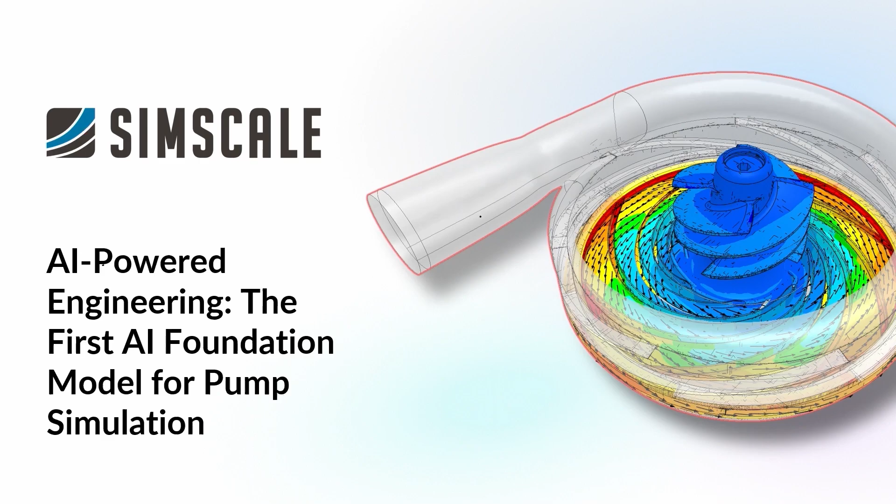We're very excited to show you what we've been doing recently with AI, and we think we're going to show you a sort of a world's first here, a foundation model specifically for pump simulation, and the first widely available one. You can go and try and use it, and we'll tell you about that at the end of the presentation if you'd like to go and try this.

I think we promised some audience participation, and we're going to be looking to you in a moment to see whether you feel ready for this kind of wave of innovation that's coming our way. I think for some people it may feel like they're already surfing down the wave, some people are still paddling out to it, some people are maybe waiting for the next one to come along. And we'd like to know really what you're doing at the moment - how are you using AI to accelerate various different things that you might be working on.

So, as the first one, research. If we could have a quick show of hands just to see if you're already using AI tools, maybe LLMs, to do research at the moment. Two, a couple. Anyone else? Yeah, we won't tell you university, don't worry.

How about writing? For improving writing, drafting. Yeah, super useful, right? Yeah, it always surprises me with that, actually. I think I've written a really good email, and then I put it through ChatGPT to see if it can be improved, and then it's always better. Yeah, it's hard to say no.

And how about simulation workflows? You got one? 1.5? Yeah, cool, okay. It's good.

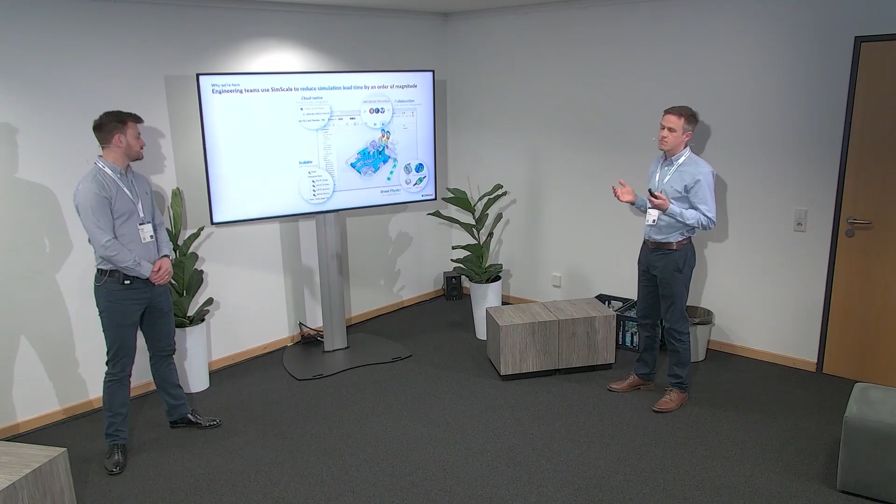So this is what the tool actually looks like, and I think one of the main impacts that it brings to our customers is that they're able to reduce their simulation lead time and turnaround time really by like an order of magnitude. And so you can see some of the key features here highlighted. As I've mentioned a few times already, cloud native - you can see also there's co-editing, similar to Office 365 or Google Docs or something like that. Collaboration, so very easy to share models. Has broad physics coverage, highly scalable, of course, being in the cloud. You're very much kind of removed from all of those typical logistical headaches that you might find with kind of desktop CAE tools.

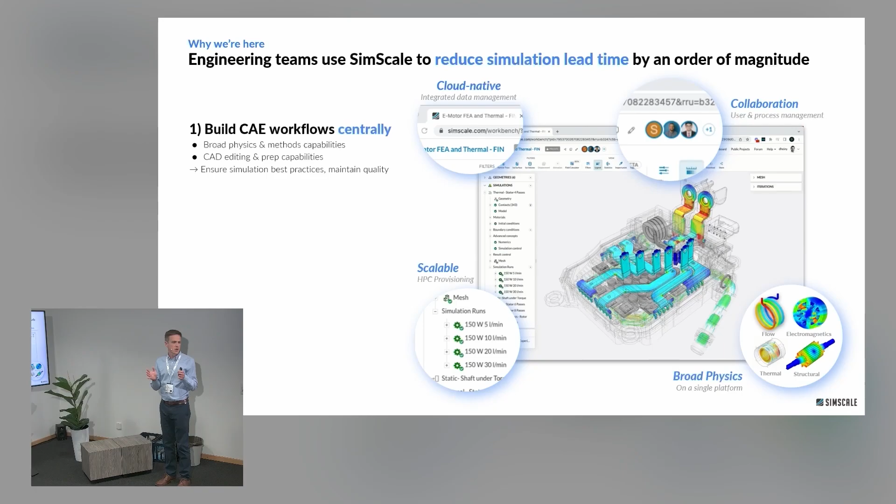So because it's cloud native, you're doing everything centrally - build all of your workflows centrally. All the physics is there, the methods, the full workflow from CAD, pre-processing, simulation, post-processing is all there in one place. This allows you to have very good control over your templatization and best practices, and you can deploy that broadly across your organization.

The collaboration aspect makes it easy to share projects between users. The whole thing is done through the web browser, so everyone gets exactly the same user experience, no matter who they are in your company. So the whole thing is very frictionless.

Crucially, for what we're here to talk about today, the AI infrastructure is also built into the same platform, right alongside the physics-based solvers. So you can easily take your simulation results, since the data is already there, train an AI surrogate, and get orders of magnitude speed up.

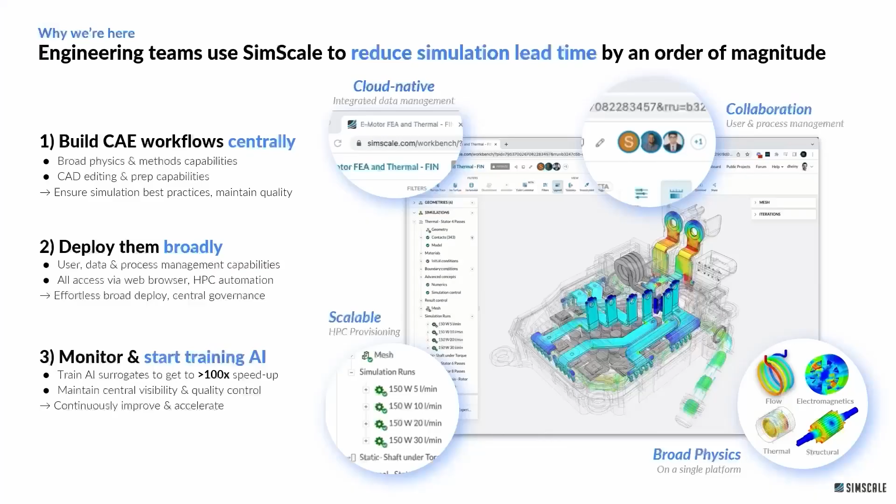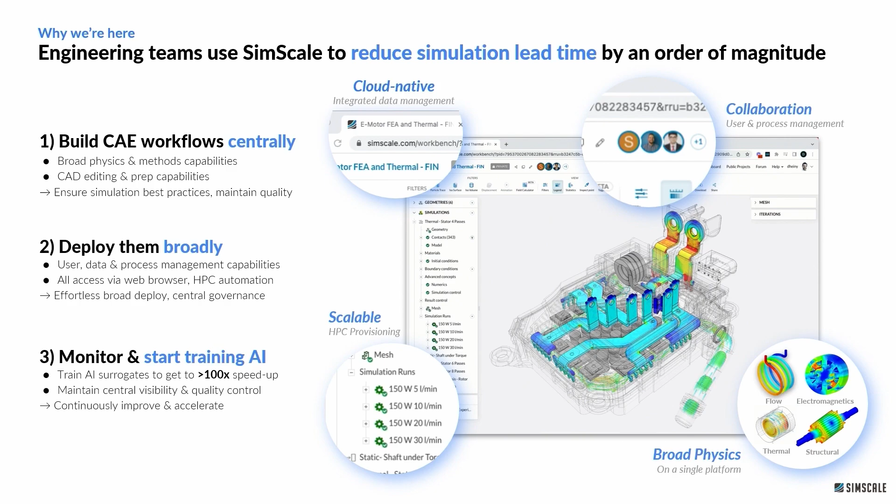That's one of the areas we're investing heavily in at the moment, to bring a really cutting-edge product to market that helps the designer with some agentic, not physics-based, but engineering-based AI to help with that setup. We'll see some examples of that later.

Back on this point of deploying broadly, that's where we're helping a lot of our larger customers at the moment. For example, big automotive suppliers are using SimScale to put a simulation tool in the hands of the designers—a high fidelity simulation tool that's easily templated and straightforward to use. In that respect, we're actually displacing a lot of incumbent simulation tools that are designed more for specialist simulation experts but aren't as easy for design teams to use. So they're pushing that simulation capability earlier in the process so they can iterate faster through designs and develop a better product at the end.

And that's following through into the AI capabilities as well. I'll say this because I'm a SimScale representative, but I think we have the best end-to-end solution right now for AI for simulation for designers, because it's all in one user interface and it's an end-to-end solution.

We can import any CAD file—we support all the major CAD formats—and you can do some editing as well. We have basic cleanup operations if you want to remove embossing marks, delete holes, or change dimensions. You can easily do that in the tool.

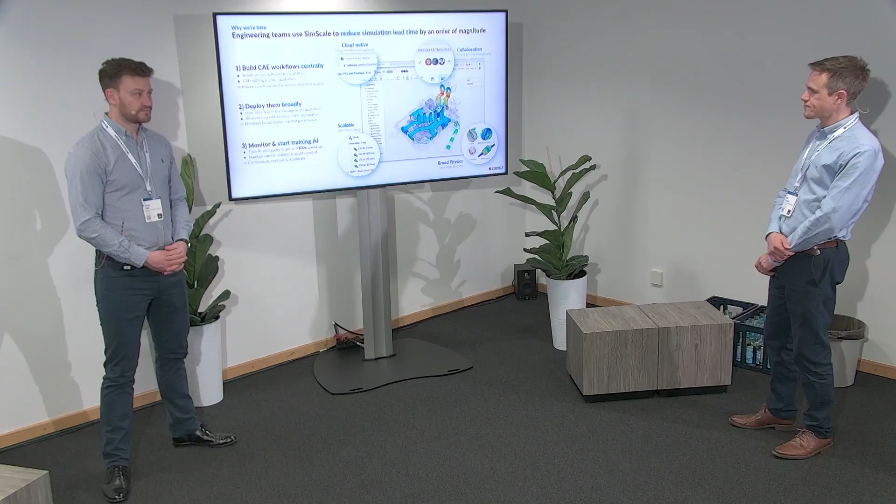Sorry, Alex. No, thanks for that.

How AI is really about to deliver some transformative acceleration to engineering workflows, to a point where maybe at some stage we'll be able to say, please design me a pump that meets such and such requirements—that's maybe ultimately where we're going. But first, let's ground things and think about how this relates to the AI tools lots of us are already using.

We can think about the things we use AI for today—we talked about copywriting, design, coding at the start. One thing to think about is why AI systems are so good at these things: they're trained on trillions of tokens, so there's a huge library of training data available on the public internet. This isn't really the case for engineering design—that kind of huge global data set simply doesn't exist.

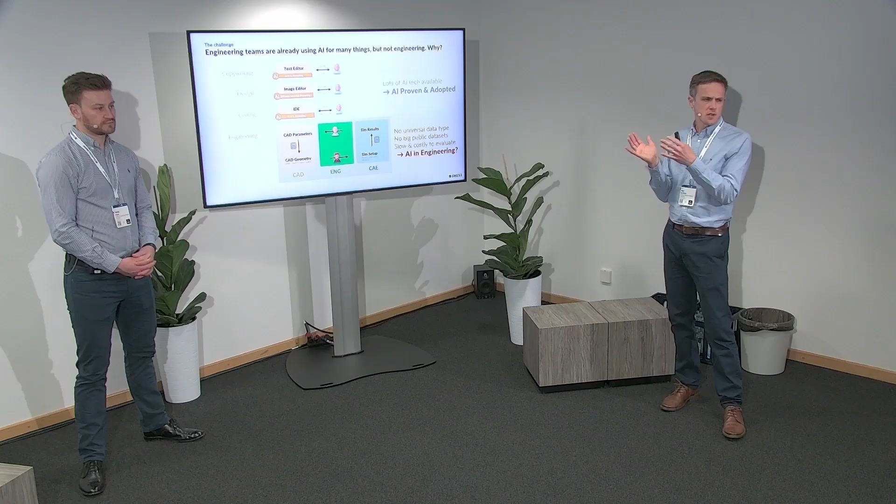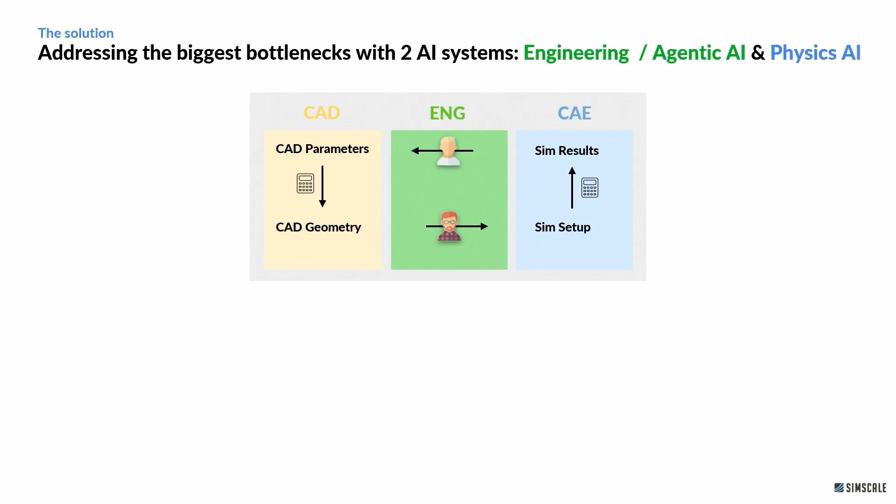I think we need something rather more methodical. And so the way that we see this looking is, if we go back to this view where we're thinking about those steps, the CAD, the engineering, and the CAE analysis, there's really like two bottlenecks that we need to address there. So there's the CAE part, the actual simulation itself, which is kind of slow, I guess, using fundamental physics-based solvers. And then there's that engineering part, which is somewhat manual today.

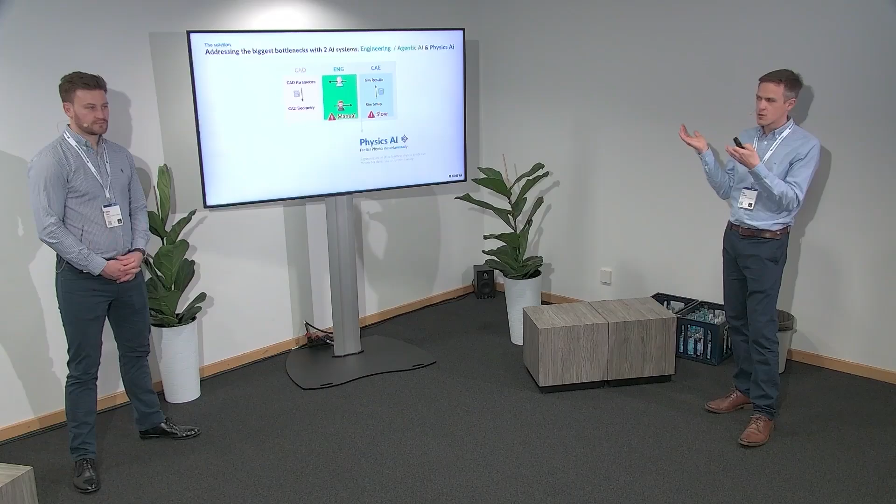So that's really how we think about AI in SimScale. We break it down into those 2 kind of categories when we're talking about it. We've got physics AI, which is the kind of deep learning surrogate model that predicts your simulation result more quickly. And then there's this agentic engineering AI, which is more going to help you with your workflows and your model setup and that decision-making process and accelerate that side of things. And then, of course, if you combine those 2 things, then you can actually really unlock a serious acceleration. So we can dive into those in a bit more detail.

The physics AI side, so I mentioned that's surrogate modeling. It is going to essentially allow you to predict your simulation results instantaneously if you have a model which is trained on the right kind of data. And what we're talking about today is a foundation model, which means a model which is pre-trained. So we have already trained this model on thousands of pump simulations, and it means that you can then use that as a sort of starting point, a springboard, if you like, to then you could pick it up and use it straight away, or you could then extend the training data set with your own data. And of course, we have the infrastructure to build models directly in SimScale as well.

And I think you're going to show that later, aren't you, Steve? Yeah, a bit later. I'll show you how we went through this process, the different steps that we took to build this first foundation model.

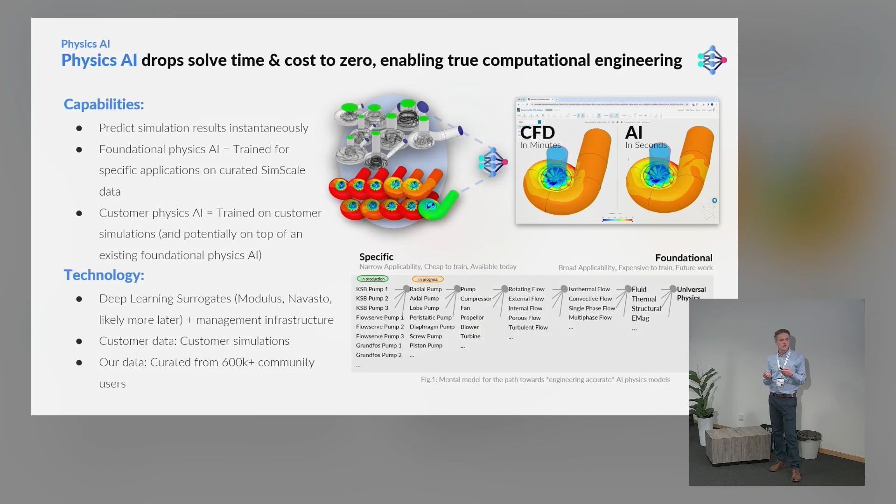And technology-wise, as I mentioned, the AI model training is really built into the SimScale platform, as you're going to see. So we can use a variety of deep learning frameworks. So we have Modulus, or actually it's now called PhysicsNeMo from NVIDIA, and Navasto at the moment. And those models are very easy to build and to manage and to deploy in your organization on the SimScale platform. The other thing that we have, which is fairly unique, is a very, very large community of open projects. So anybody can go and pick up the platform, open an account, and start running simulations that are public. And so we have over 600,000 users, including commercial and community users. And so some of that data is also available to build and augment models.

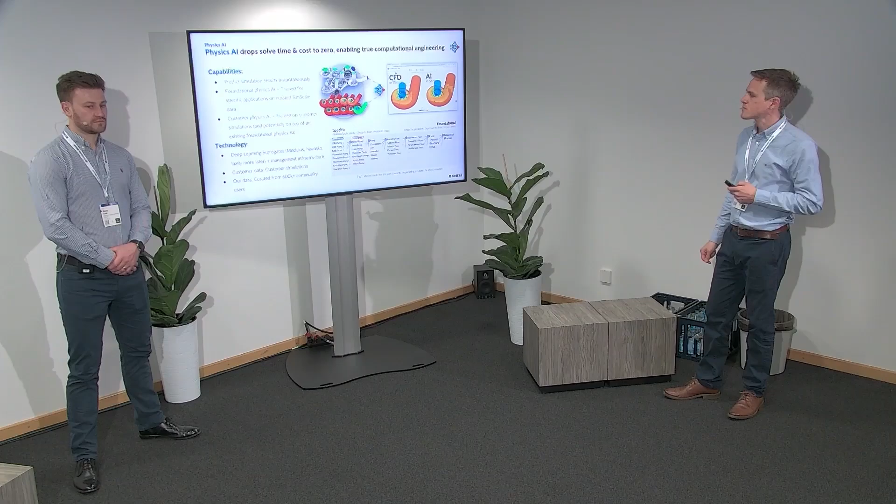So then the other side of it is the AI for engineering, so the sort of agentic side of it. And at the moment in the platform, we're really developing this very, very fast. So we're going to show you a little proof of concept in a moment that can help you set up simulations. So at the moment, we're really focusing on accelerating that manual work and helping you go through the model setup process and helping you run models and then decide what to do next.

And later we see that extend to full design iterations where the model can go and then make changes to your CAD and explore more designs. And then we can start to actually do that design space exploration sort of autonomously.

Here you can see a couple of examples of how this would work. You would be interacting through a natural language interface with the platform, so with a little pop-up, using a RAG LLM. Then you can have a conversation with the agent about what it's doing, and it can ask you questions, you can ask it questions, and it's quite a collaborative relationship.

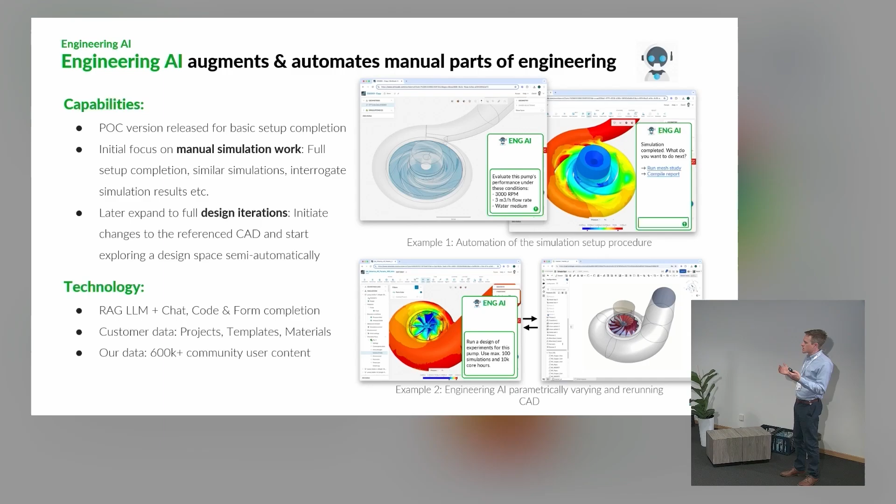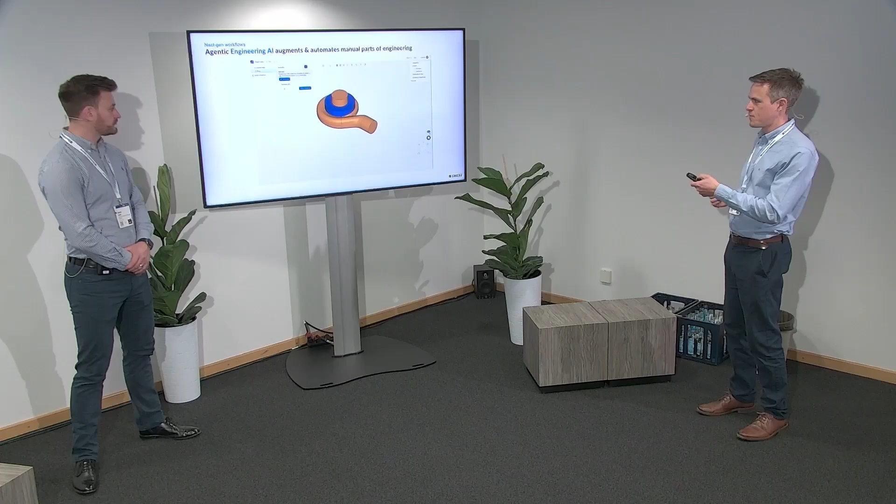So I think now we have the demo. I guess if I advance the slide, it's going to play the video. This is a quick beta release that we've put together.

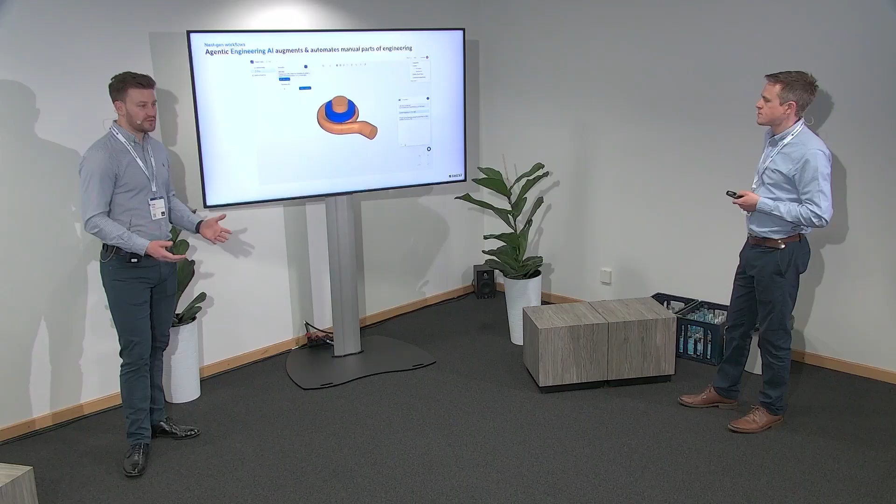Here the end user is uploading a PDF document with the requirements. This could be an RFQ for a pump design. The LLM is extracting the requirements from that and checking back with the user what the RPM should be for this setup. Then it goes ahead and validates the setup, completing the setup for the simulation based on what was in the RFP document.

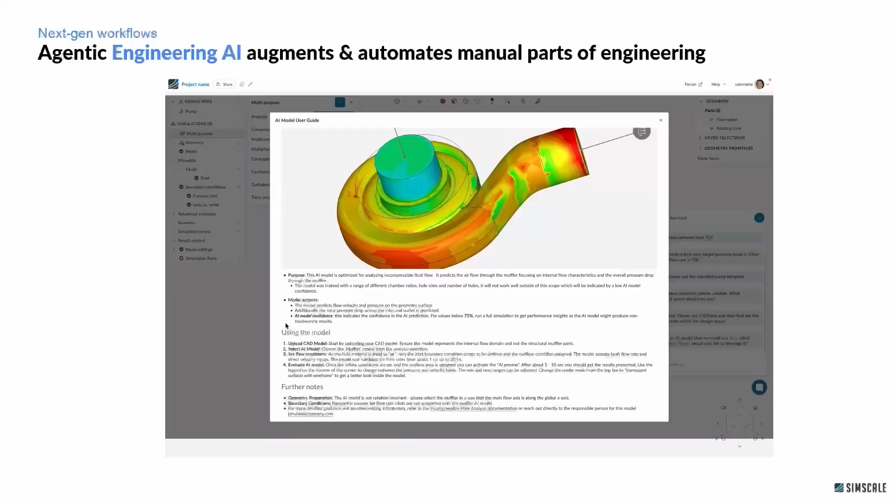Then it's suggesting that we already have a template for a turbo pump. This is a foundation model that we've made available in SimScale, and it's recommending that we use it in this case. Then it goes ahead and uses that foundation model.

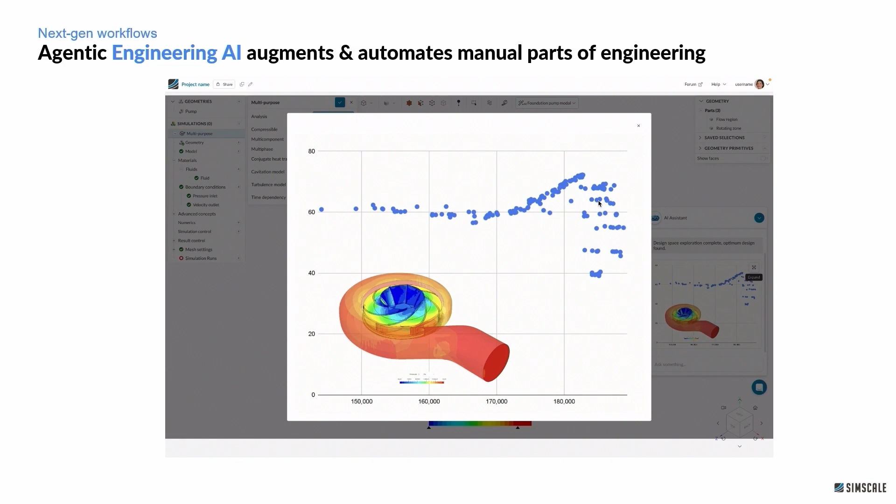The nice thing it's doing here now is running an optimization loop using that foundation model. So rather than having to wait an hour for each simulation to complete, the foundation model is predicting the performance in seconds. So you can do an optimization in seconds to really hone in on the parameter space that would be of interest for this pump.

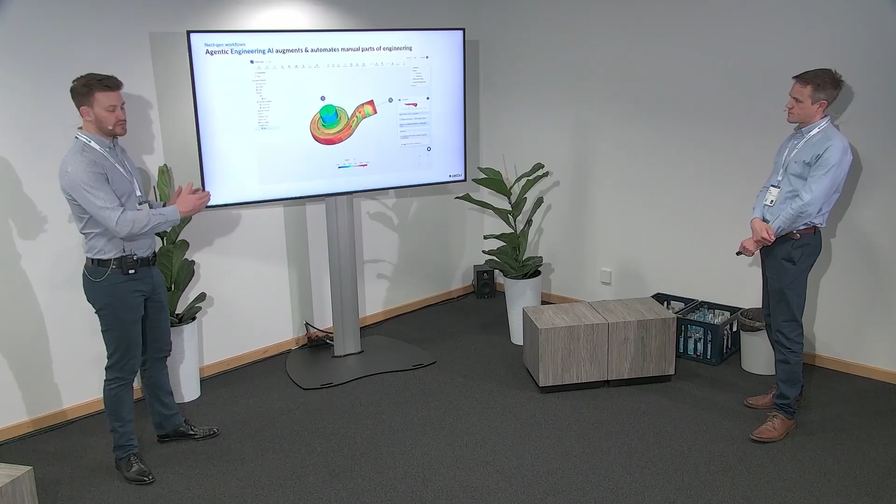So that's all happened through the interface. And then we're just asking it to run a full PDE solve as well, to validate some of the results that were obtained during that optimization run.

And then as a final step, we would say, I would want this in a PDF report, and then the LLM would create a downloadable report of all of the steps that it's just gone through so that you could hand that over to the customer.

So this is really focused on reducing that lead time that you have. We see a lot of pressure in the industry at responding to RFPs in time, and this helps provide a response in hours as opposed to days or weeks to that initial request.

So I think what you've just seen really shows how powerful that combination of those two AI systems is.

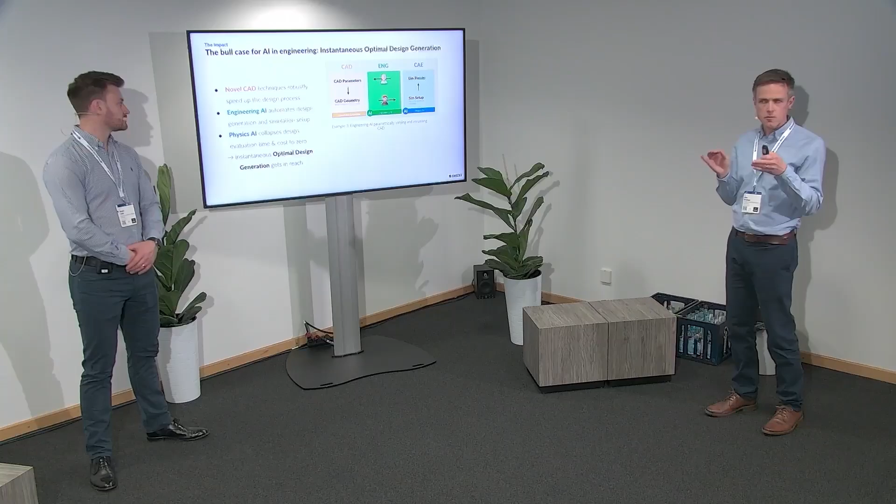So we can really cover that whole workflow from the CAD, the engineering stage, and the simulation stage, and that really allows you to totally collapse the kind of turnaround time for that entire study, effectively to zero, compared with what it would take to do the whole thing with manual work plus the full solve for each design point.

So we can talk a bit more about how you actually do that, like how you would build that AI model. And SimScale has this very unique built-in infrastructure.

So the whole process, the data generation, the data preparation, the model training, the management, and then also being able to use the AI prediction and the simulation result side by side in the same interface, without having to move things around or use two different tools, all in one place. Typically, assembling this kind of tool chain with lots of different solutions would be a lot of work, and it would slow down how you can actually use that.

So it's very easy, but I think what we often hear is it sounds really great, but maybe I don't have the time to invest in doing that model training. Clearly I need a decent set of data to be generated. I need to build the model, then I need to see if I'm going to get value from the model.

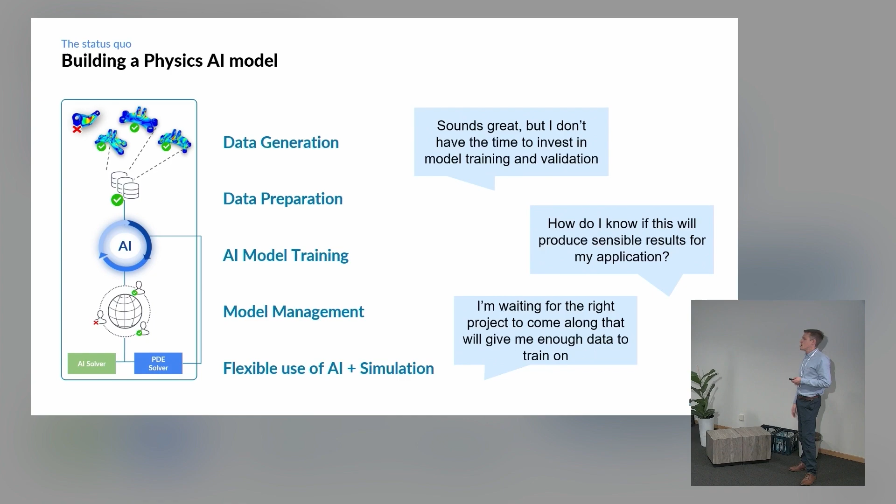So there's a bit of a leap to really get going with this technology, or maybe you're waiting for the right project to come along so that you'll have enough data to do it with. And then how do I know that it's going to be worthwhile if I actually go and invest this time? So that's really where I think a foundation model can really help to turbocharge that adoption.

And so the way I like to think about it is it's like going directly to base camp. We're not saying that it's going to take you all the way to the top of the mountain, but it's taking you to base camp, so it's much easier to then explore your surroundings and make an ascent to the top. You can pick it up and use it as it is. It's going to give you some decent results, and then you can also tailor it to your own designs, adding training data to make it more specifically focused to get even greater accuracy.

Of course, we're talking here about a centrifugal pump foundation model. But we'd also like to introduce more of these for different applications, to give engineers a toolbox of starting points for using AI in simulation. So that's a brief introduction, taking us up to what the foundation model is for.

And Steve is going to take us through some demos. Unfortunately we can't do a live demo on the screen today, as we're limited to using a pre-prepared deck, but we can demonstrate this on a laptop afterwards for anyone who's interested. We've got a series of videos that show the process.

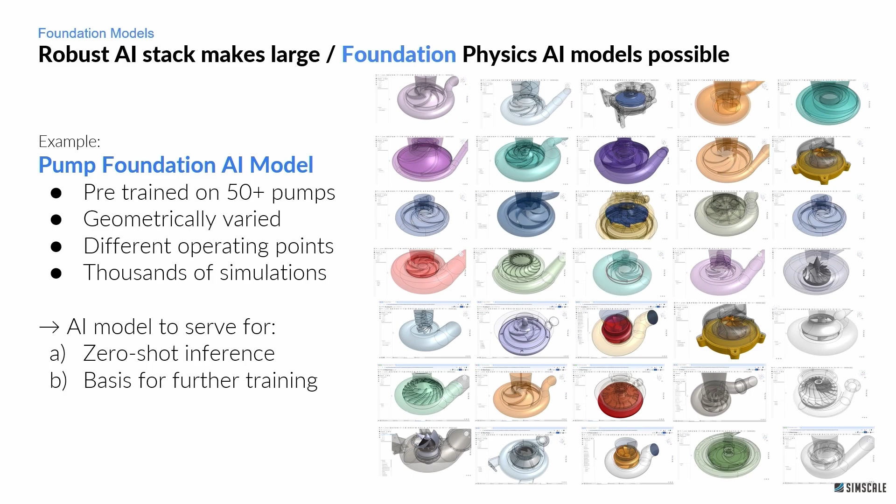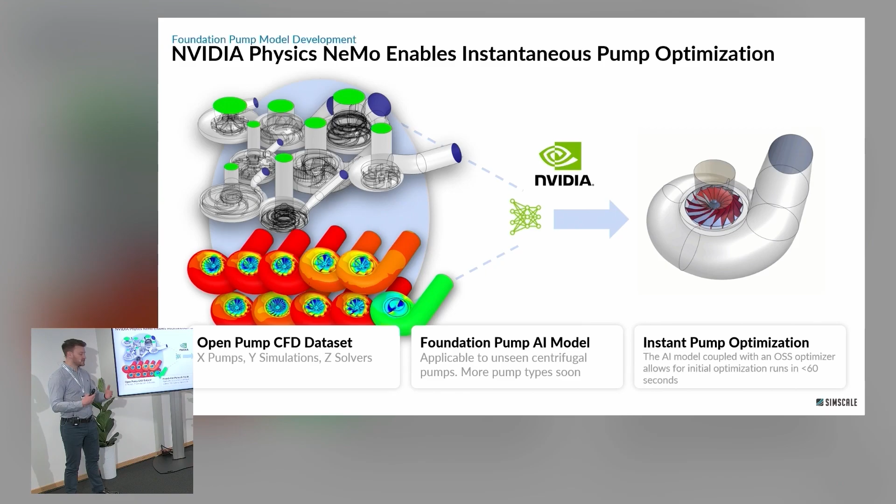And to do this, on this specific foundation model, we're leveraging some technology from NVIDIA. Two weeks ago I was in California at NVIDIA's GTC conference, and we released this pump foundation model there. Essentially, it's an open CFD dataset that we've trained on PhysicsNeMo to make it possible to predict the performance of a pump in real time. This is something we're going to continually develop - it's the first foundation model we've released, and we're going to keep adding to it to improve it.

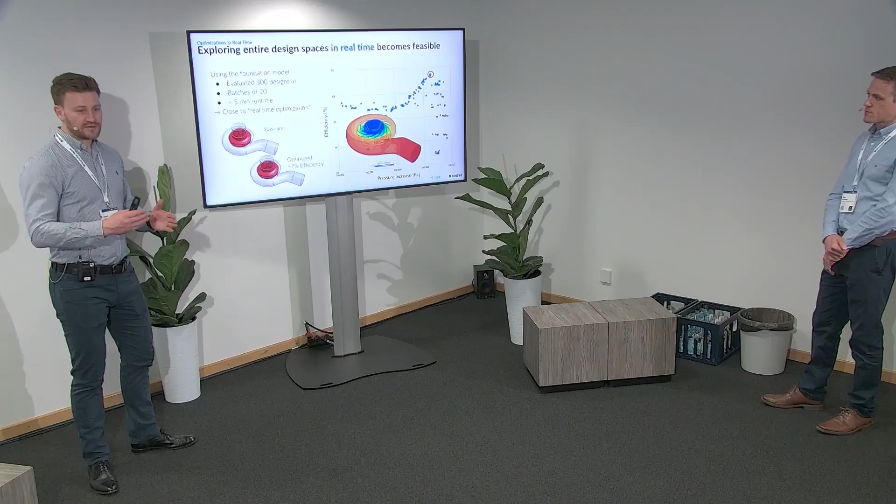So what you're seeing here is an optimization algorithm with a CAD system in the loop. The optimization is generating a CAD, that CAD is being uploaded to SimScale, and then the foundation model is being used to predict the performance of that pump at that operating condition. Then the optimization algorithm takes the end result and decides how to adjust the geometry for the next iteration. Through doing that, we hone in on the optimum efficiency region of the plot, where we see the highest pressure increase at the highest efficiency.

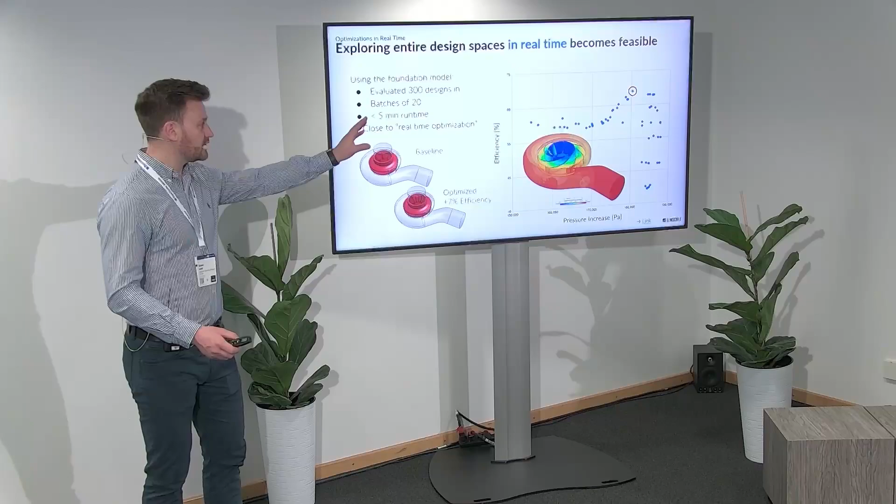And then, obviously, we could validate those results by doing some full PDE CFD results, just to make sure we're in the right area. But it can get you to that region very quickly without having to investigate solving partial differential equations and doing CFD in this region, so you can purely hone in on the area of interest.

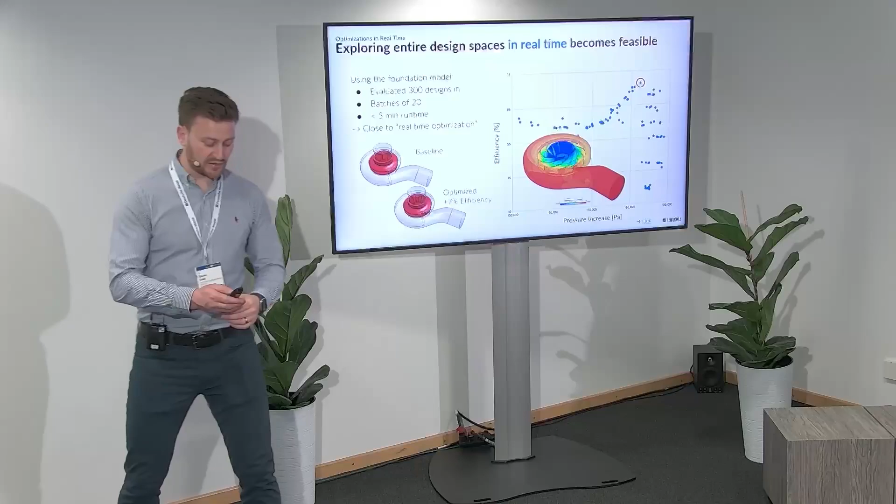So this is made possible using NVIDIA's technology. Unfortunately, our NVIDIA representative couldn't join us today, but he's passed on some slides for us to deliver. So I'm not NVIDIA - we're both from SimScale - but I'm going to deliver some slides here that NVIDIA gave us to present today.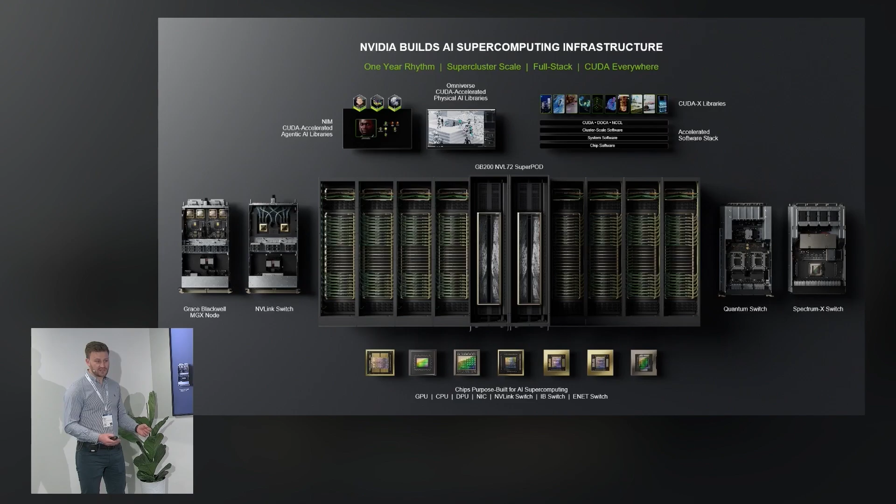So I'm sure you're all aware of NVIDIA. Their core business is generating GPUs, and more recently that has gone in the direction of creating supercomputers for processing AI. NVIDIA have really established themselves as the leader in the market for AI hardware.

NVIDIA makes some really great software libraries available, like the CUDA-X libraries for accelerated simulation. SimScale was actually featured in Jensen's keynote on the 18th of March for the work we've been doing to accelerate simulation.

So how does this work? They have a tool stack of software that's also open source and available for people to integrate into their platforms. There's various tools available: Warp is used for design optimization, and it can be used for virtual training of robot systems combined with Omniverse. CUDA-X is the library of solvers, so you can use NVIDIA to run CFD using CUDA-X libraries.

There's also NIM, PhysicsNeMo, and Omniverse. Omniverse we use for visualization and analysis, which can be used to set up digital twins. PhysicsNeMo is really the main tool we've been leveraging for this foundation model. It's an AI tool with various libraries available, including PINNs and GNNs.

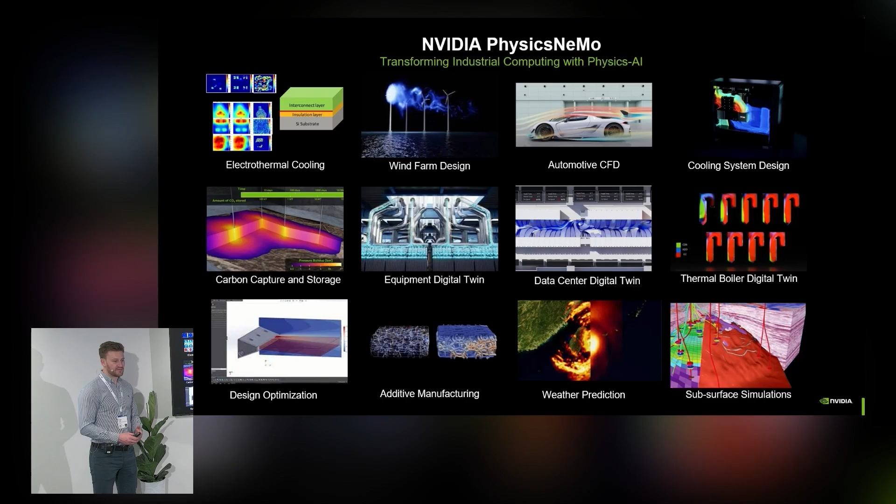PhysicsNeMo has quite a broad capability set. You can use it for various use cases, including additive manufacturing, computational fluid dynamics, structural analysis, geothermal analysis. There's many different use cases for it in the market, and many solver providers are leveraging this capability—not only SimScale, it's an open source code.

That's one of the things we really like about it, because we're able to leverage it and put it out into industry, and NVIDIA are really happy to get feedback from us about how it's being used in real-world settings so they can make changes and improve it and build a better library.

So how this works is we use something from them they've coined blueprint technology. These various CUDA-X libraries are able to be delivered very easily by providers like SimScale because they provide a blueprint, a template of how it can be used with the interconnecting code required to implement it, all provided in the template. We worked with NVIDIA, they provided us the blueprint for, in this case, Omniverse, and then it's very easy to add that in and make it available.

We started implementing PhysicsNeMo in January, and it's now available on our platform and in production. Within 1 month, we had a working prototype. Within 2 months, it was ready and deployed. So it makes it very quick, with great support from NVIDIA for that.

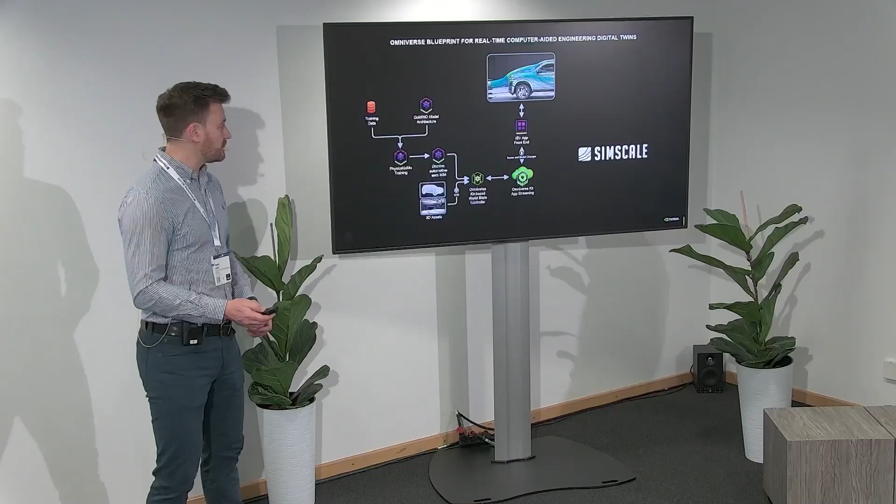This is another example, slightly more complex, of the blueprint. I'm not going to take you through exactly every step of how this works—I'm also not fully familiar with this—but it's an example of how it's put together and how we've implemented PhysicsNeMo.

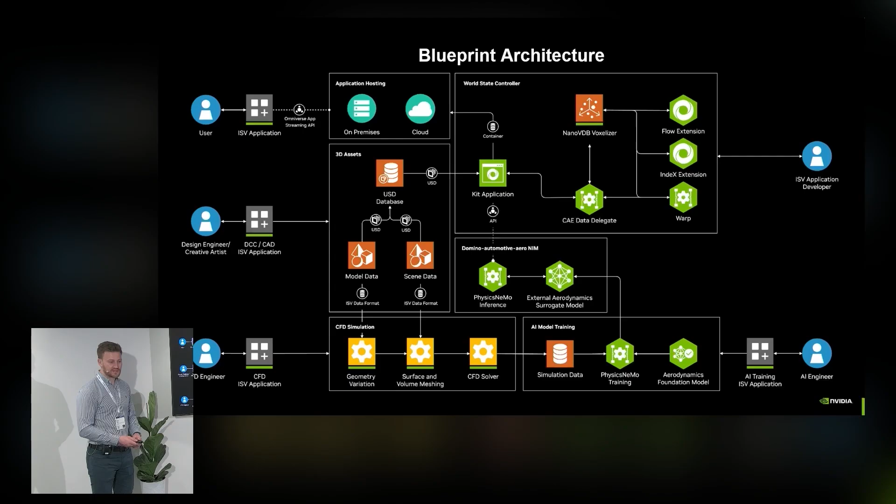Okay, so I'm going to show you now how we built this foundation model. And it's not rocket science, anyone can do it, and that's the great thing about SimScale. This is an end-to-end solution. In some organizations, big companies, there are machine learning teams, AI teams that have been working on this for decades, with experts to collate the data, catalog it, and train AI models. That's great and can work very well, but it doesn't provide one end-to-end, easy-to-use solution.

The difference with what we've implemented here is anybody can do this. Any engineering team can create the training data they need, run the simulations, and then train AI models on that data and deploy them broadly within the organization. You don't need any experts who've learned about AI or machine learning to PhD level—you just need CFD engineers, mechanical engineers to be able to run it.

So, I skipped a few somehow then. Okay, so the first demonstration is on the CAD preparation.

We're going to look at parameterization of the CAD. In this circumstance, we used Onshape. We have a good working relationship with PTC Onshape. It's kind of our equivalent in the CAD world. Onshape is also a cloud-based tool, just like SimScale. We have a tight integration. But it doesn't have to be Onshape.

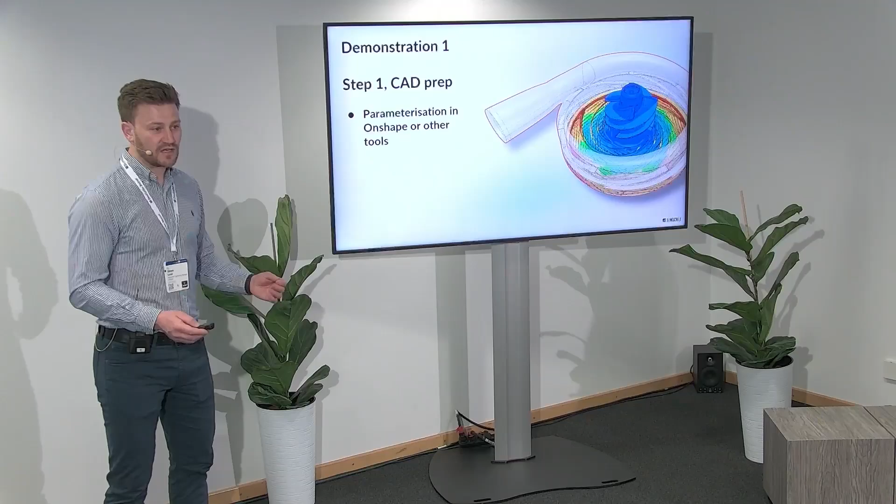You could do this with Siemens NX, you can do it with SolidWorks, you can do it with FreeCAD, you can do it with any CAD application that has API access. So the first step was to create the pump geometries.

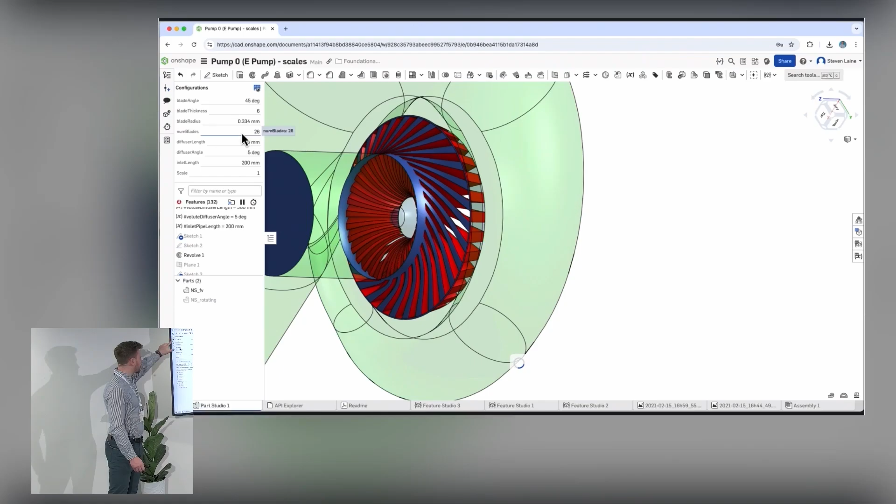So here we're looking at an example of how to parameterize a pump. We took a pump in Onshape and put in various parameters. You can see we've got blade angle, blade thickness, blade radius, number of blades, diffuser length, diffuser angle, inlet length, and the scale of the pump. So all of these can be driven through an API script to create different pump geometries.

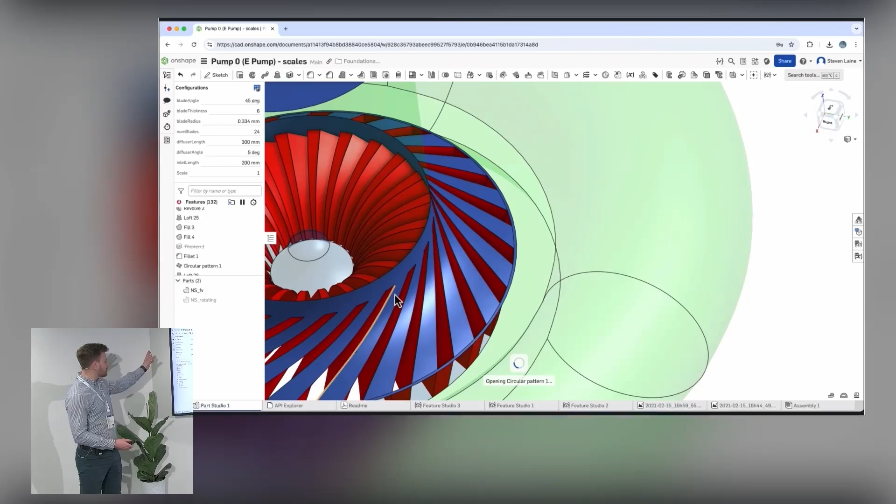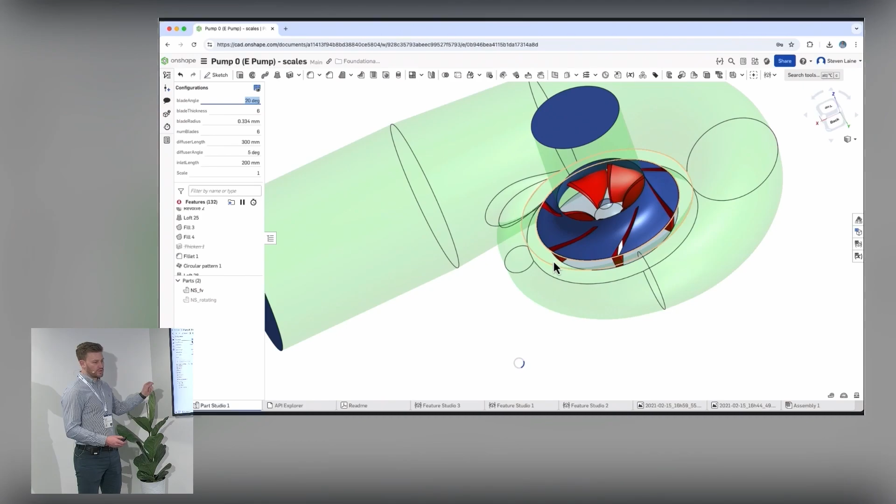Here you can see some examples of how this is done. The number of blades in the CAD is parameterized to that number of blades parameter. When that's changed in the UI, obviously the number of blades changes in the CAD. The important thing is that this can be driven directly from the API, so it can be driven from an optimization algorithm, and then you can create thousands of different pump geometries from one pump original geometry. Now we took 50 of these geometries and parameterized them.

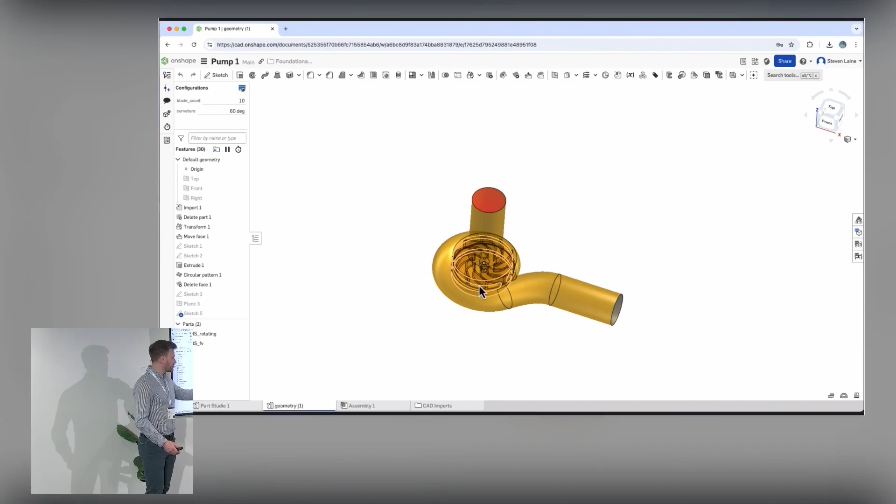That gave us a very broad and wide data set that we could use to train the foundation model. There is still some limitations there. We always aligned the inlet with one of the cardinal directions, we always aligned the outlet with the same direction, we always had the rotating region in the same axis, and the impeller always rotated in the same direction. So there is some limitations there on the CAD.

You can't put any pump orientation in, but it does mean that you can put in any centrifugal pump that works in that way. So we created this very large library. We ran thousands of simulations on that, and then all of that gets combined to create the foundation model. So that's the first part, the parameterization of the CAD. And I have to say, that's probably the most labor-intensive part of the process.

What should happen, obviously, in a real-world situation is you already have all these CAD geometries built up over time in your engineering organization. You can just leverage those. But because we're generating a foundation model here, we had to create this data set artificially.

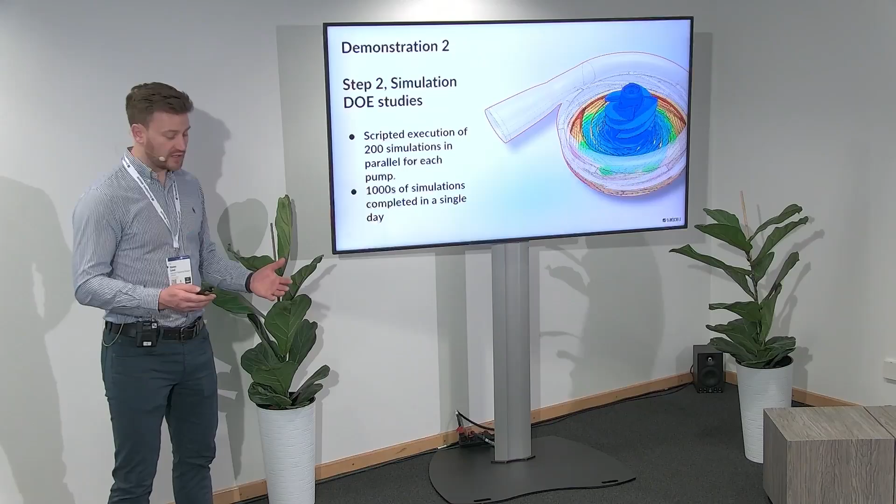So then the second step is actually running the DOE studies. For each of those pumps, we started off a 200 simulation DOE study. Because SimScale is in the cloud, those 200 simulations can run in parallel, so there's no need to wait a long time. You can generate this sort of level of data set in a couple of days. With traditional tools, having to run sequentially, it might take months to be able to generate this data set. We were generating thousands of simulations in a single day.

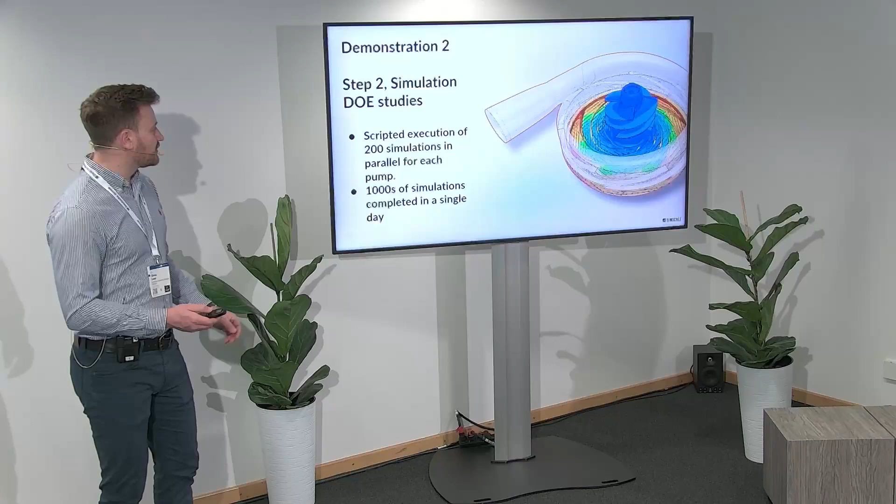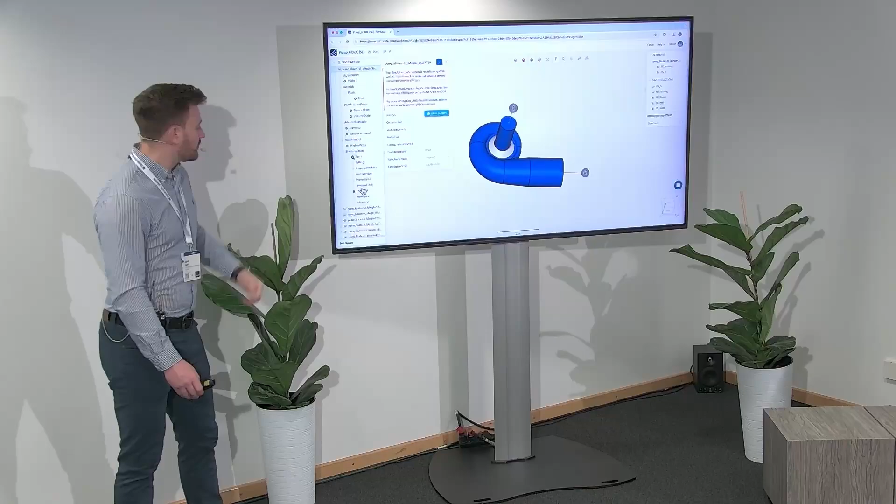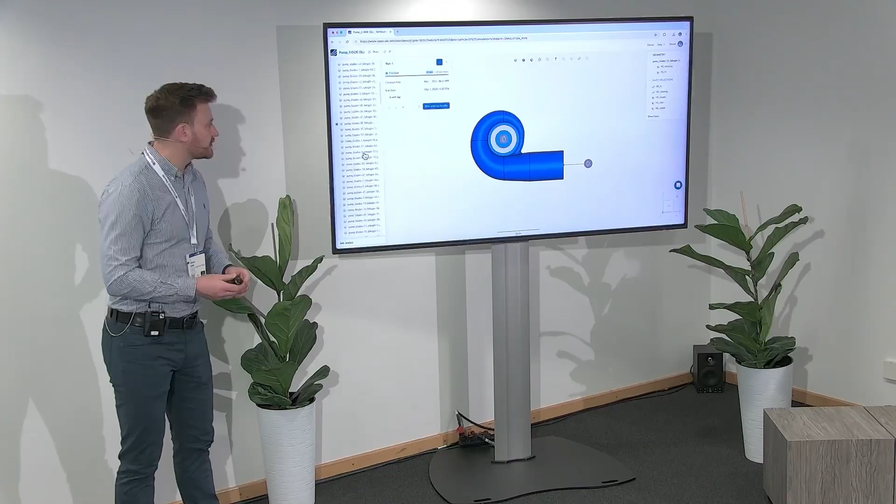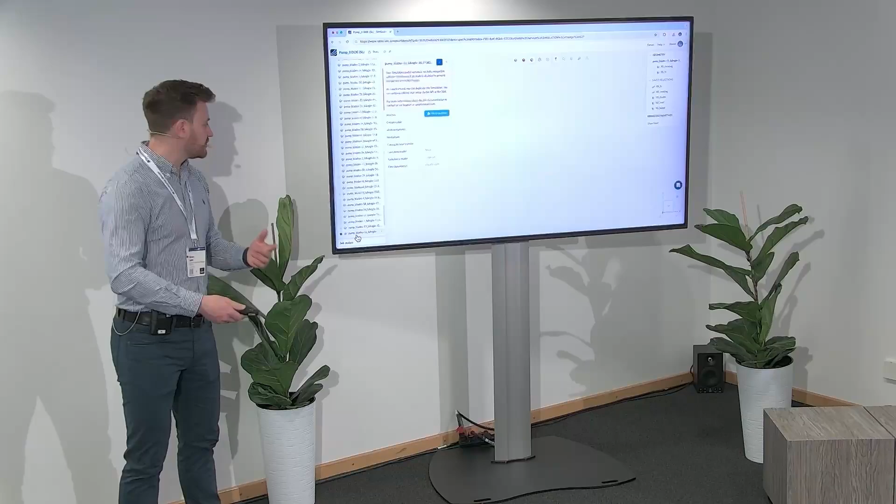When this script runs, what you get generated in SimScale is a list of simulations with everything created programmatically. Once that script is run, you can go in and have a look at all of the simulations. Each one takes 31 minutes, and they all run in parallel. So within 31 minutes, you've created 200 simulation data points that you can use, and then you just go through and do this for all of the simulations. It's frighteningly easy to create a very large data set of simulations in very little time.

So yeah, they vary in runtime, some 30 minutes, some 15 minutes, depending on the number of blades that there are. This is just showing, again, the post-processing image that you would see in the UI. But really, the UI isn't too important. You can use it to check the results, but we're leveraging these results then through the API mainly.

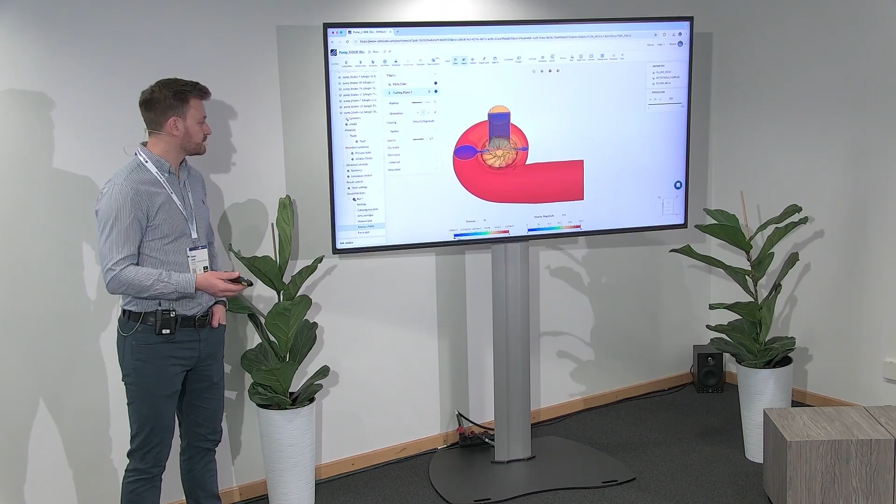And then the third step is training. This is one of the most difficult parts if you're going to be doing it independently of an end-to-end solution like SimScale. You need to have GPU infrastructure to train on, and you need to have all the data pre-collated and tagged so it can be used. But in SimScale, we take care of all of that automatically.

One of the great things about using SimScale is you don't have to plan to use your simulations for AI. Just by generating simulations and using SimScale, you're already preparing to use AI in the future, because we automatically save all of your data and keep it in a structured database. Then at any point you can switch on AI, and you don't have to go back and clean the data at all.

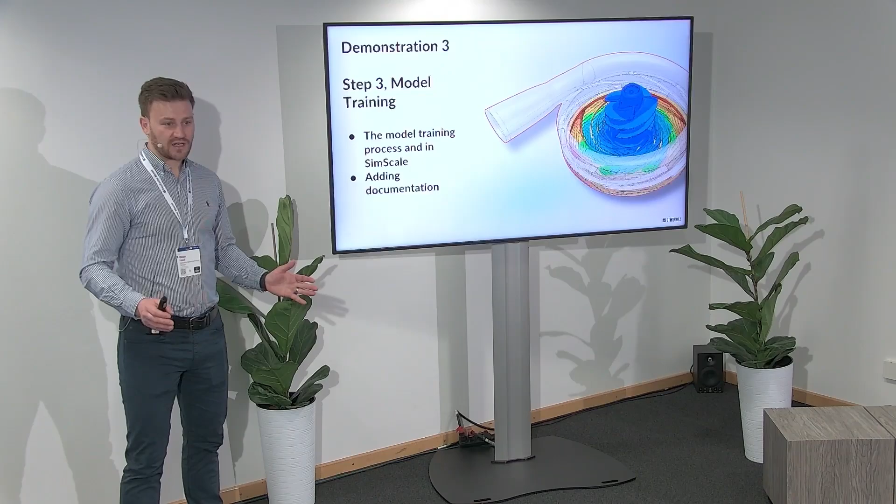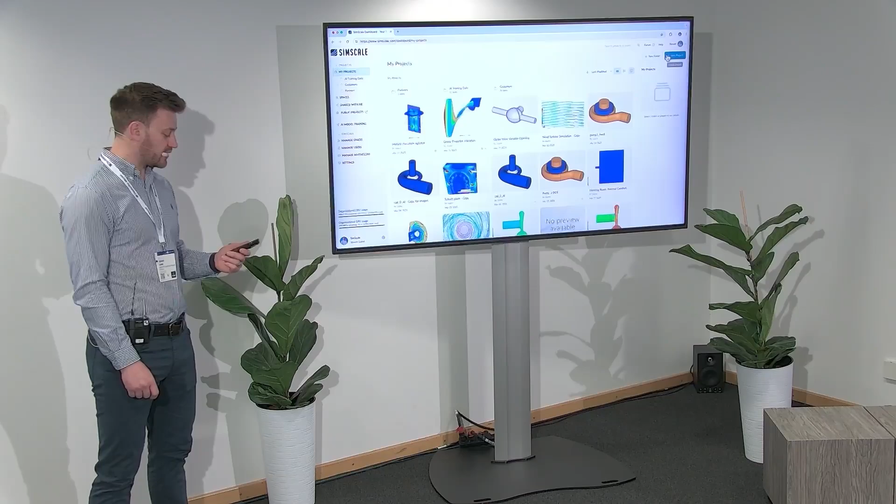So here I'm going to go to SimScale from a web browser, how I would always log into SimScale. Go to my dashboard. Here I can manage in my organization who has access to train AI models. And then if you have the right privileges, you just go in and create a new AI model. It's just like creating a new simulation. So you give it a name and start to set up that AI model with a description, and you can also add supporting files and documentation.

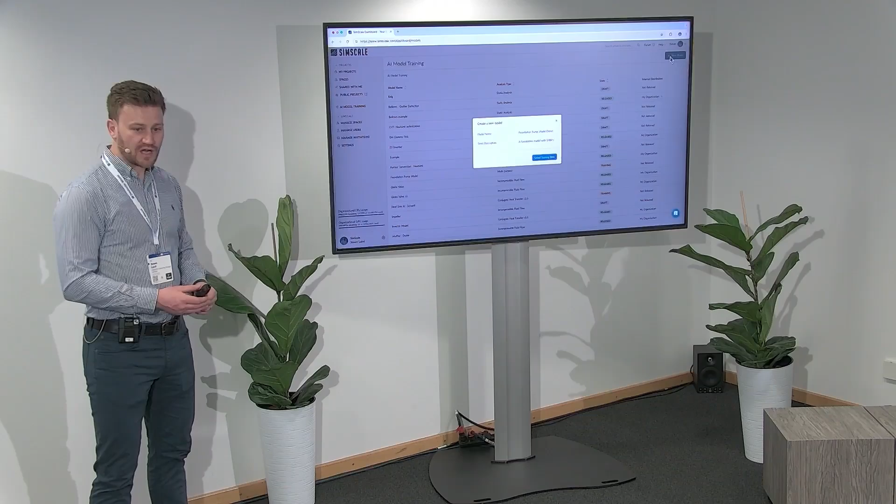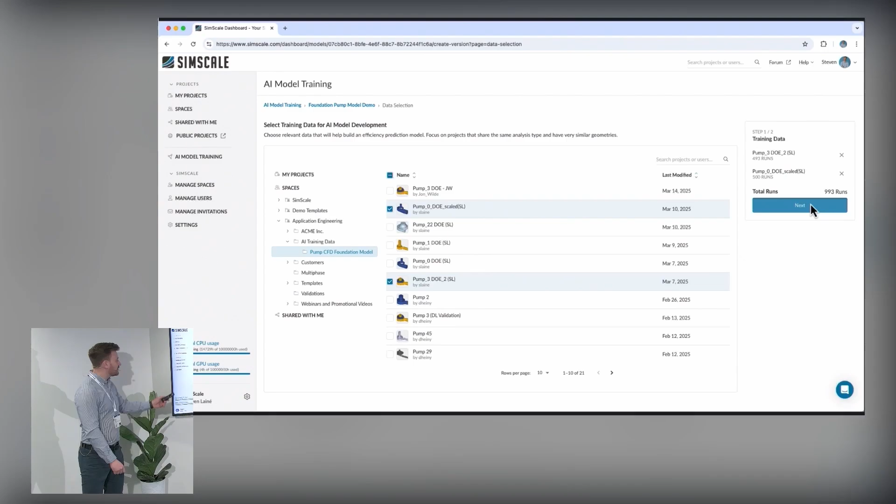So here I'm just setting it up, and then I say I want to select the projects to use for training. So I go to my folder where I've been training the foundation models for the pumps, and I select the data sets I want to use for that training. In this circumstance, we're using 2 of those projects, and you can see there's 993 runs. Then I just give it a name and add the supporting information.

So it's literally as easy as setting it up and pointing the AI algorithm at the simulation projects that you want it to use. We have some automatic tools to identify outliers in the data. This is really important to automatically detect, because maybe there's some failed runs or erroneous data sets, and they will have an impact on the performance of that model.

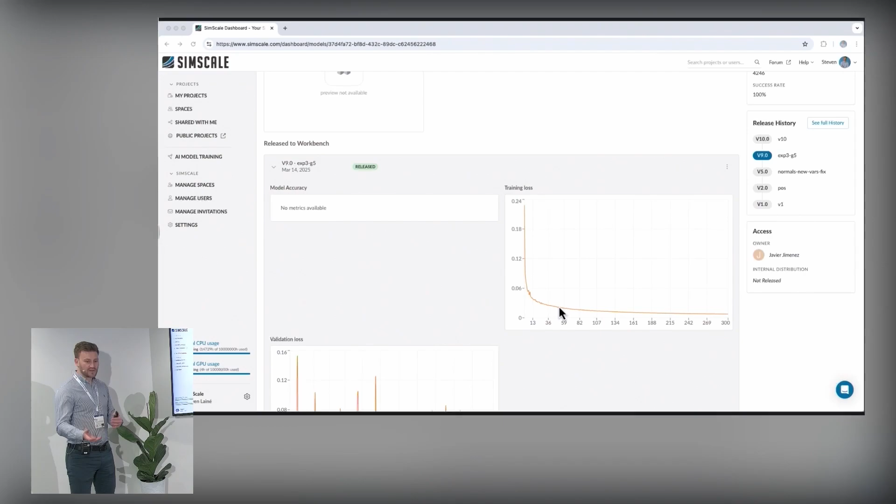When you want to deploy this out to the organization, you obviously want to have documentation that goes with it, so people understand the limitations I mentioned regarding where the inlet has to be, where the outlet has to be. And then here we can see the training that has been processed. We can see the training loss curve, how it's progressed through. And then we can actually deploy that.

So we can see at this point, the foundation model is released to the community and everyone has access to it. Everyone in the organization can log in and make use of it. You can also see who's used it. Yeah, so you can see this particular model has had 4,246 uses when I recorded this video last week. That's mostly internal use at the moment, but also by our partners at NVIDIA, and we're making it publicly available as well now.

Okay, so the final step is how we deploy that model and make use of it. We've been through how to create the data from CAD, simulation, how to train it, and now it's how we actually deploy it and make use of it.

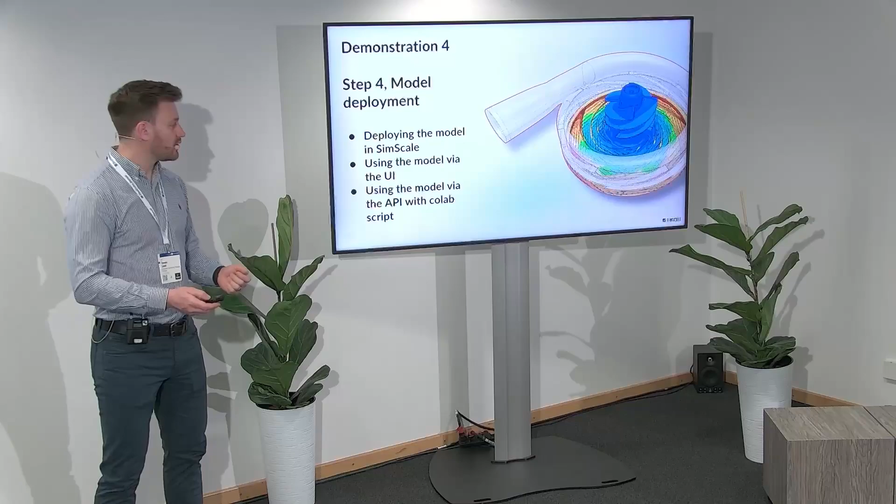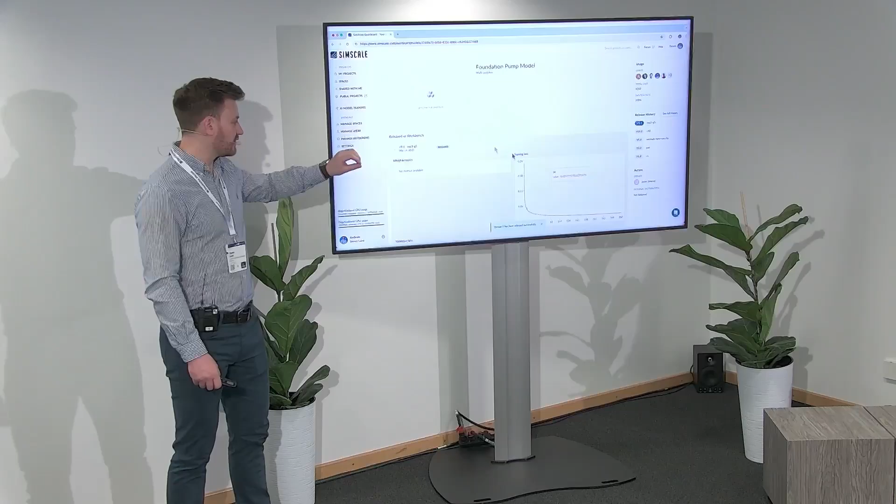So again, this is within the SimScale platform. I just showed that one was released. But we're kind of taking a step back here to what you would do. You would come in, analyze the data, see how the training had gone, and then the release process is as easy as just clicking release in the platform, and everyone allowed access to that AI model will then be able to use it.

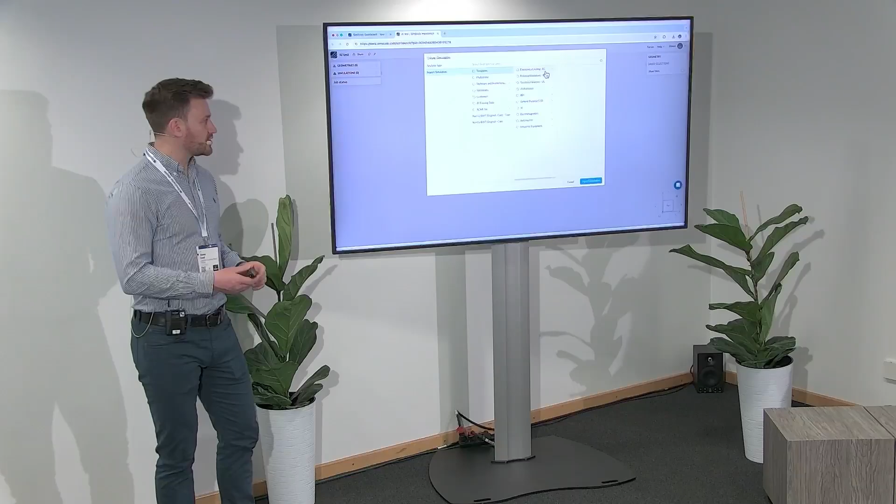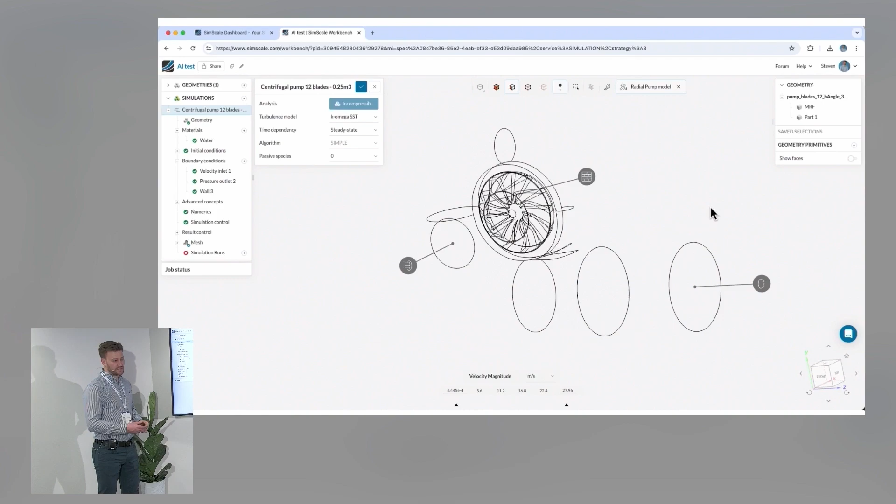So how it works: as an example, you go in through the UI, you upload a new CAD geometry or start a project from an existing template in your organization for designing pumps. So here I'm using an existing template that brings in a CAD geometry. And then to use the model, I literally select the AI model from the top drop down, and we get an instantaneous prediction of the different results, pressure, velocity, predicted directly onto the CAD.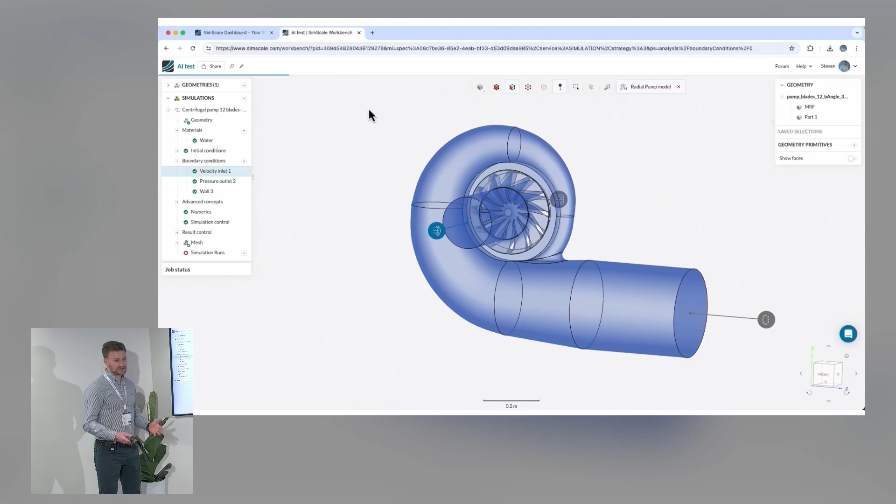One of the critical things we include here is a confidence rating. This is really important when you're using AI. As I'm sure you know from using LLMs like ChatGPT, it will always give you an answer, won't always be correct, but it will always give you an answer. Especially with chatbots, it'll give you a very confident wrong answer. So the important thing is you see how confident the AI model is in that result. If you get a low rating, you know you need to retrain based on more data in that parameter space.

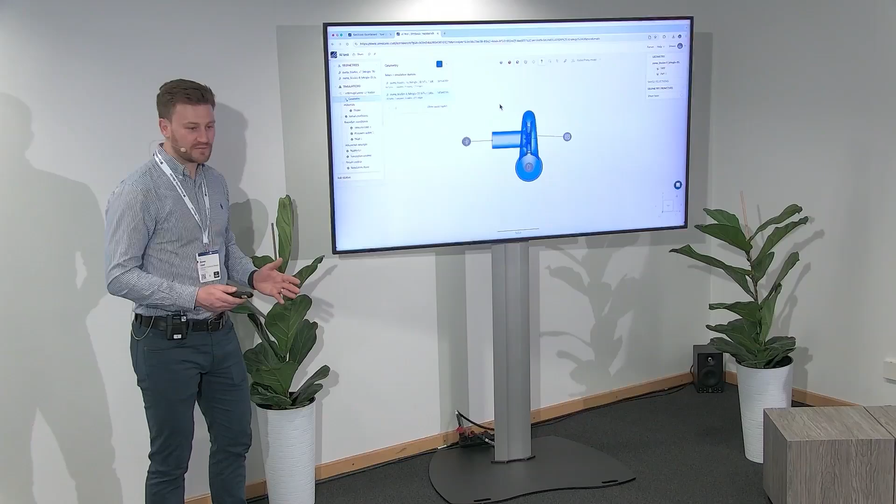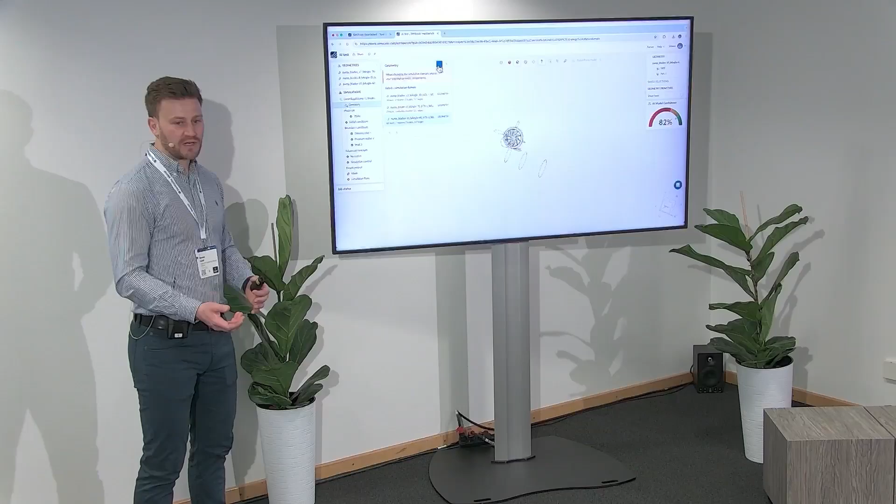In this demo, I've just changed the geometry, swapped it for a different one, and I get an instantaneous prediction again. So you can see for a designer at an early stage, it's very quick and easy to iterate through designs, run what-if scenarios, change the number of blades, change the size of the pump.

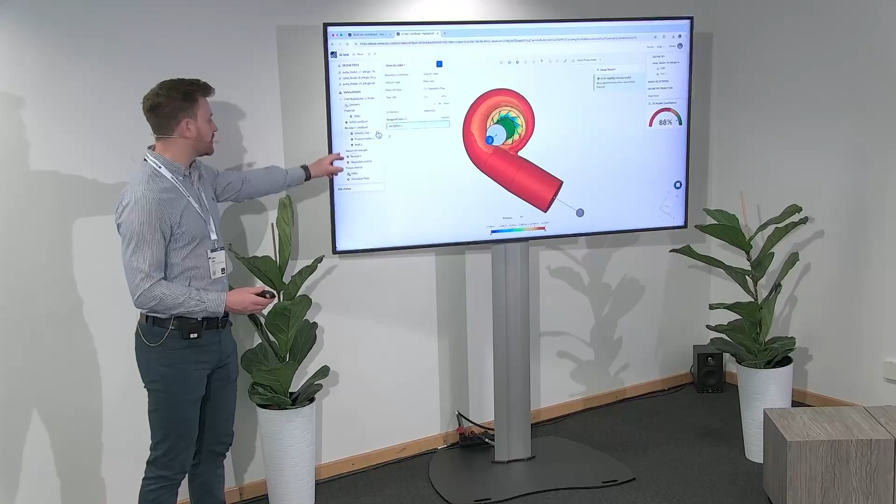And get predictions on how that pump is actually going to perform. We have another geometry, and then in a moment I change the inlet to something outside of the parameter space this model was trained on - a very high flow rate. This AI model doesn't know what to do with a flow rate that high, so we see the confidence score is now very low.

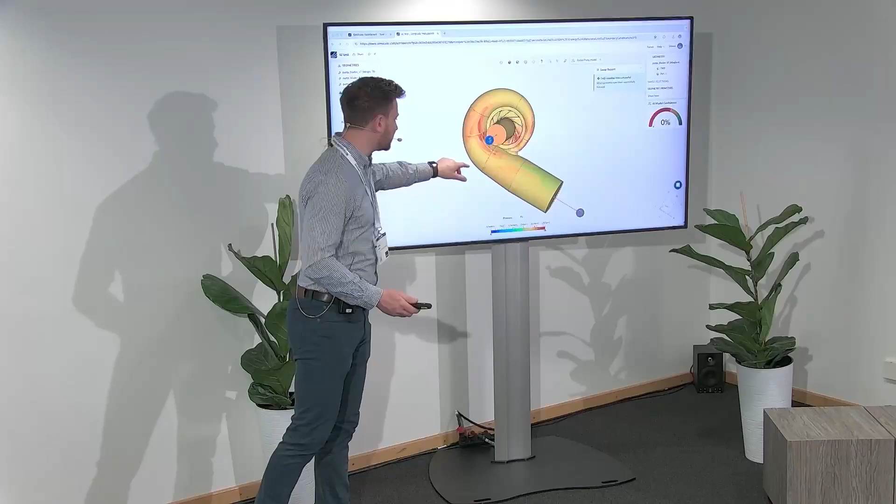We get a confident result plotted in the display, but you can see it's complete garbage - it doesn't make sense. And the important thing is we see the confidence score, so we know that the AI model is extrapolating as opposed to interpolating within the data that it has.

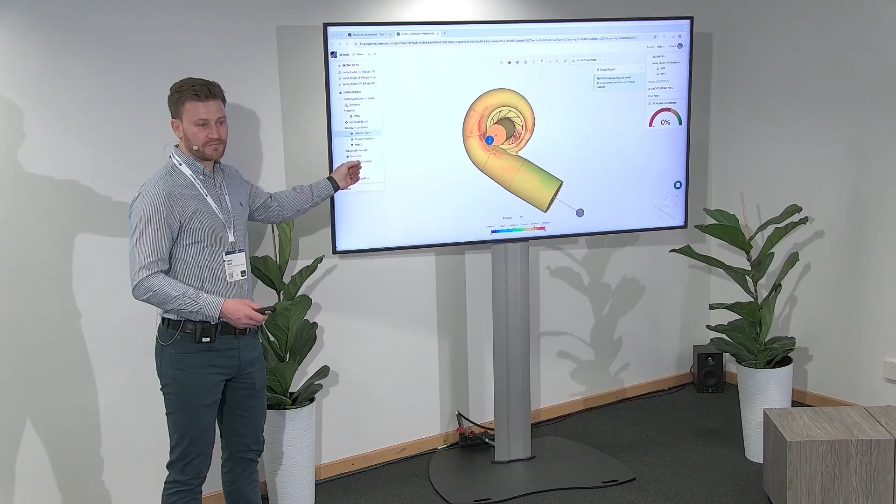In this situation, what we would need to do is run a few more simulations. We wouldn't need too many more because we already have a well-populated foundation model. Run a few more simulations in that parameter space, then rerun the training part that I showed you to retrain this model, including that data. Once that new model is available, publish it to the community and everyone can make use of it.

We've already seen this video, so I won't play that again. This is the AI assistant, just helping us to do the same setup and respond to the RFP.

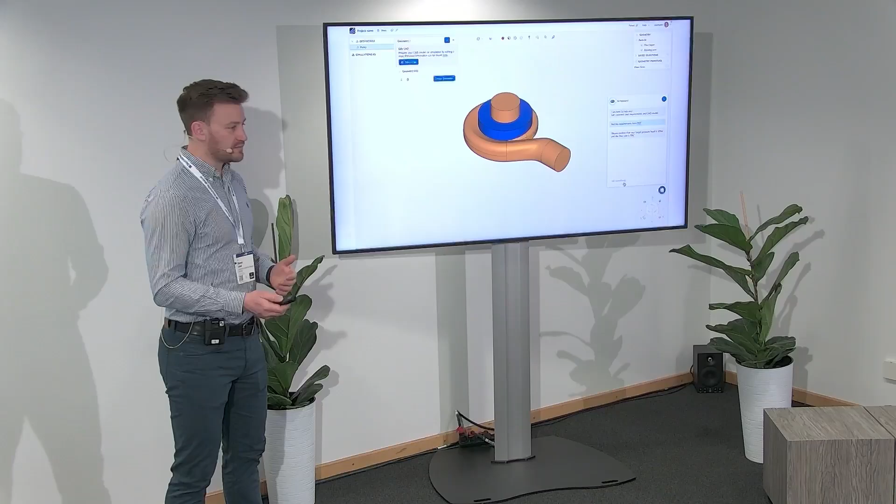I showed it in the UI, but obviously the strength of this model that we've shown for running things like an optimization is the fact that this can all be run through the API. As attendees of this workshop, you will all receive as a follow-up the Google Colab script required to run this optimization that you see here.

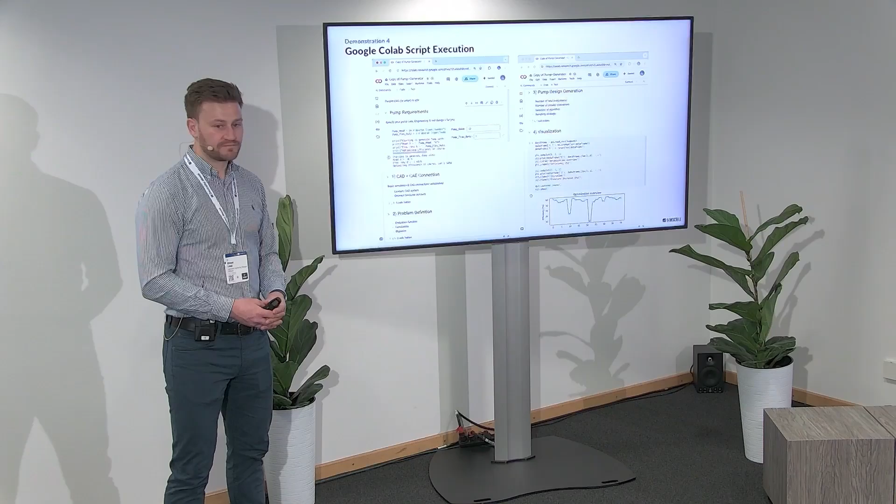So just to recap, what have we seen and what have we been through? We've seen how a foundation model can provide instant simulation results, how it can provide instant optimization, and Alex talked about how this can be a base camp for you to train your own model.

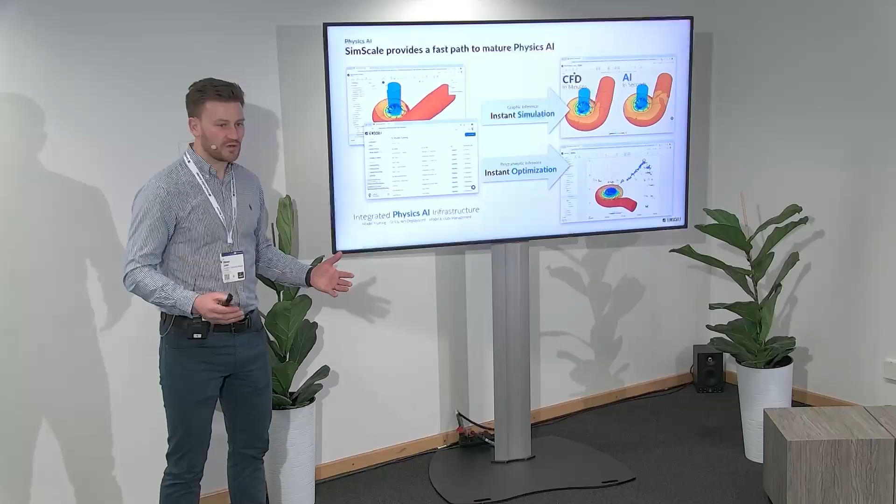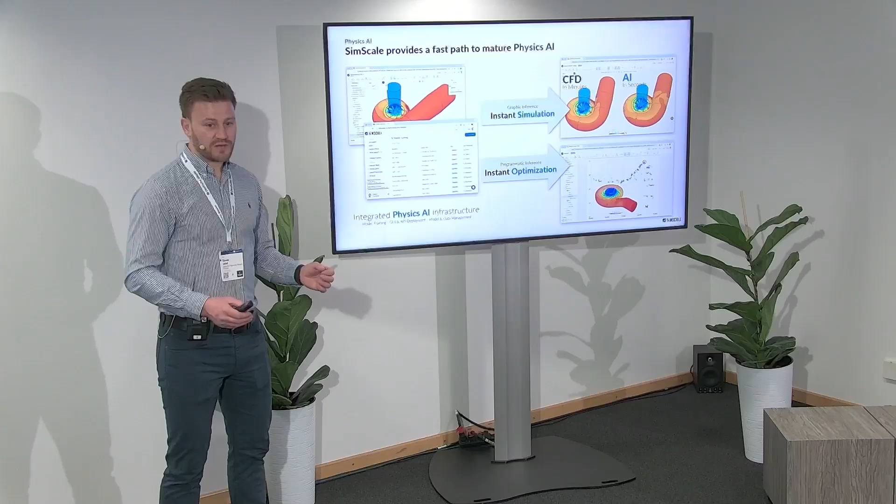This foundation model is not going to work for all pumps, it's not going to give a great result for everything. But we've already put thousands of simulations in here. For you to train this on your pump designs, you only need to add maybe 100 simulations, and then you've got an AI inference model that works for your pumps. So we've done the hard part, and you just have to add in a bit more data.

So we're pretty much on the limit, there's not much time for questions. Is it already 10:30 now? 10:27. Oh yeah, right, okay.

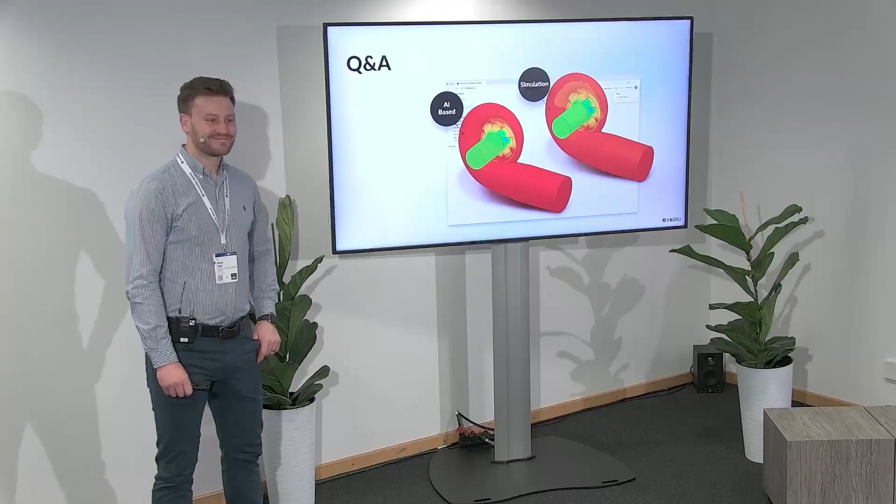Well, thanks very much, Steve. I think that was really good - really good demo, showed exactly how to do this. So if we have questions, we're very happy to take those if we still have time. But of course, you can grab us afterwards as well. We could just pop outside if you want to have a quick chat or a quick in-depth demo.